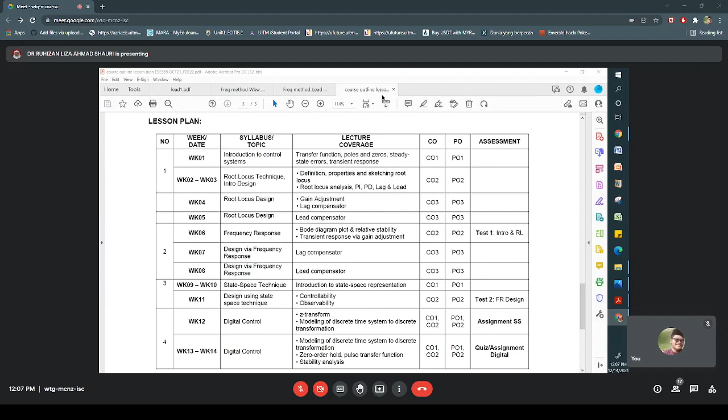I think that most of you are here now. Let's start with the lead compensator.

As what you have learned before in your root locus - guys, are you ready? Can I start? Okay, thank you. For lead, it is like the root locus that you have covered before.

Come on. Iskandar is here or not? Is Iskandar here today? Do anybody knows about Iskandar? Is he okay now?

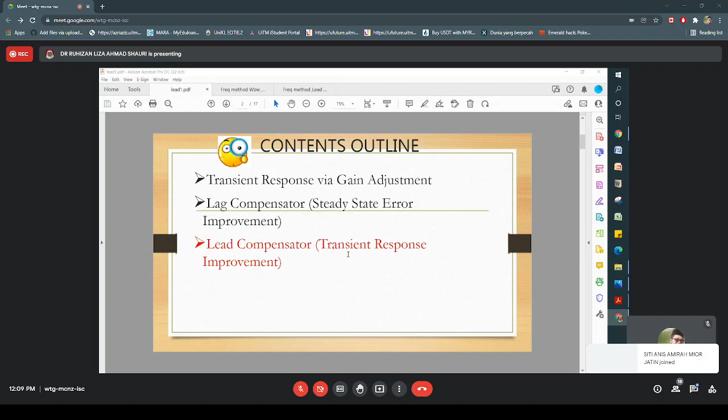All right, like what you have learned before for the root locus - from the root locus, transient response improvement needs the lead compensator. Okay, so here the same concept, you need the lead compensator, and for this topic, you are looking at course outcomes second and third.

The second is the ability of you to analyze the performance of your system using the frequency response method, and thirdly, the third outcome is about the compensator design, same like the lead design.

Yeah, this is from the PDF slides that I've already shared with you before. If you look at the lines here, the lead compensator is used to increase the bandwidth of the system, in order to improve the transient response of the system. Bandwidth is the keyword there.

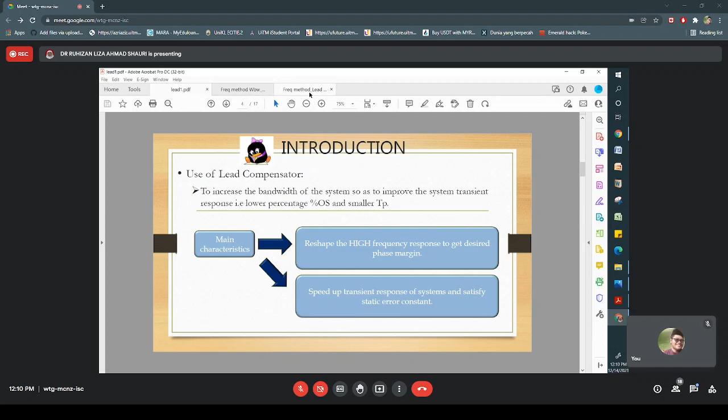So you can see the reshaping of the high frequency response of the magnitude to get the desired phase margin. Okay, several lines there. Now you come back here and read back, but now I'm going to show you the picture. I think I also have that here.

Yes, all right, now let's look at here. Same like with the text - this is the textbook, from the textbook, number 9. I do have the same thing here, so I will open this one instead.

Now if you read through the lines, it is to increase the bandwidth by increasing the gain crossover frequency, omega GCO. Where do you get omega GCO? It is when your magnitude plot, the magnitude response, crosses 0 dB, the gain crossover. That is where you have your omega down here.

All right, so your omega is there. In other words, that is where you start reading your phase margin from the phase plot. So that is omega GCO.

So here, increasing bandwidth, at the same time you are increasing the gain crossover frequency, by using the lead compensator. Now let's look at this plot, let me explain about this plot.

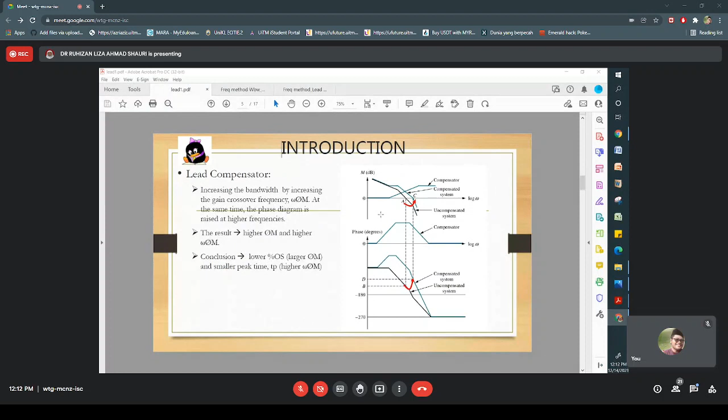Now, this bold black line is the uncompensated system magnitude plot. Now this one, can you see the blue line there? Yeah, okay, so this one is the compensator line.

Compensator's magnitude response. Now, remember your lag compensator, you draw it this way, starting from PC. It goes down with a slope of minus 20 dB per decade and then straight again. So you can see that it is opposite to what you will have with the lead compensator. You're going to draw this based on the calculated PC and ZC from the steps.

So lag is going downwards, lead is going upward, and because of that, GC, the lead compensated transfer function, GC times G, the original G, which is coming from this one. GCG multiply, so in the semi-log graph, it becomes plus, right? So here, the bold solid black line plus with that GC becomes that line. I hope that you can see my cursor. That is the lead compensated magnitude plot.

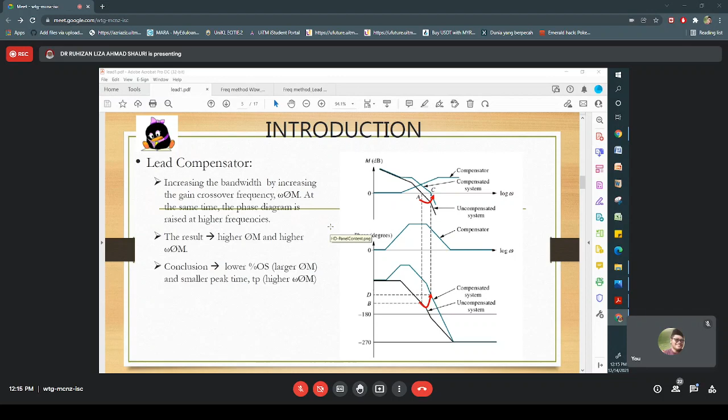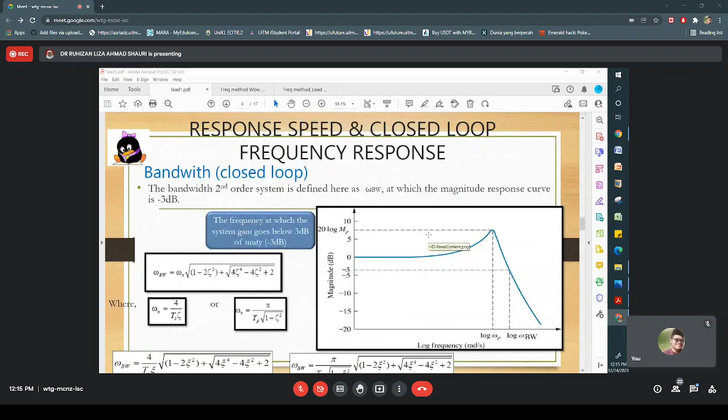Now, having that, this is becoming the new phase margin. We skip that first because that is the step. I want to explain why bandwidth matters, what it has to do with the transient response parameters: TP, TS, TR. Here we focus on these two, TP and TS, as they can be related with the omega bandwidth.

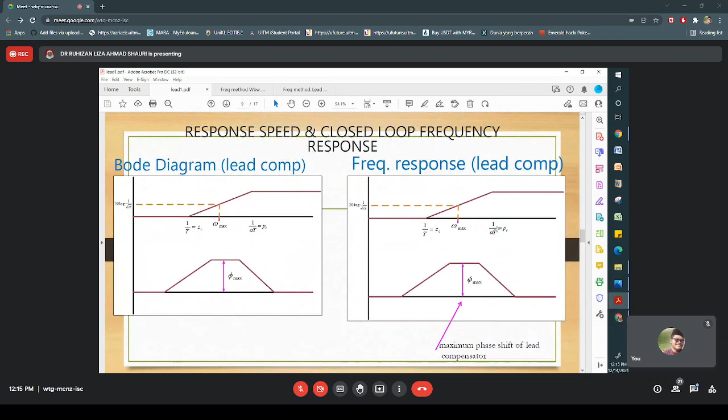Okay, I cannot see my laptop. Can you see the slide? This slide, the equation down here. Can you see it? It's a bit lower. At this, on this page, yeah.

Omega bandwidth is related with 4 over TS.

Hold on, Iskandar is here. Okay, thank you for joining, Iskandar. Are you good today? Are you feeling well now? I hope that you are fine. Yeah, Iskandar.

Okay, all right, let's continue. Omega bandwidth, look at the equation. This is with TS and this is with TP. Now, what do you think about the relationship? Is it directly proportional to TS and TP, or how?

The omega bandwidth is inversely proportional, isn't it? When it is inversely proportional, you can see that when you increase the bandwidth frequency, you will have better performance of the system in terms of the response time, right? The peak time shorter, TS also shorter.

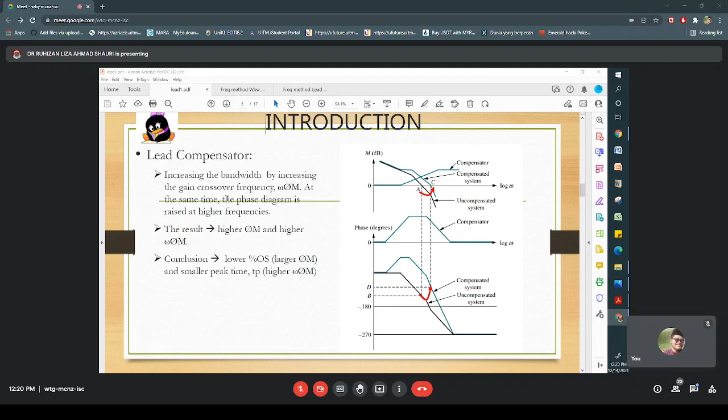And that can be done by doing the lead compensator. Related with the TP and TS, increased bandwidth would be able to shorten your TS and TP by this relationship. Got it?

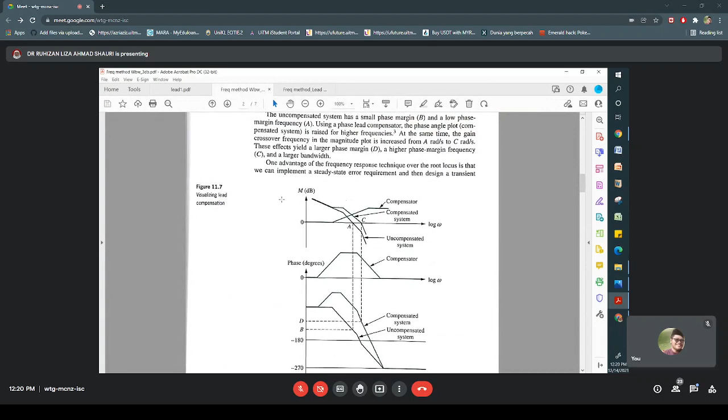All right, now I will explain more about the bandwidth using this page, from the textbook. When you talk about bandwidth, you also know about minus 3 dB. The minus 3 is where you can read your bandwidth frequency.

Okay, let me open my graph here. Let me show you the concept graph first, before I show the real graph. When you talk about minus 3 dB, you look for your bandwidth frequency from both graphs.

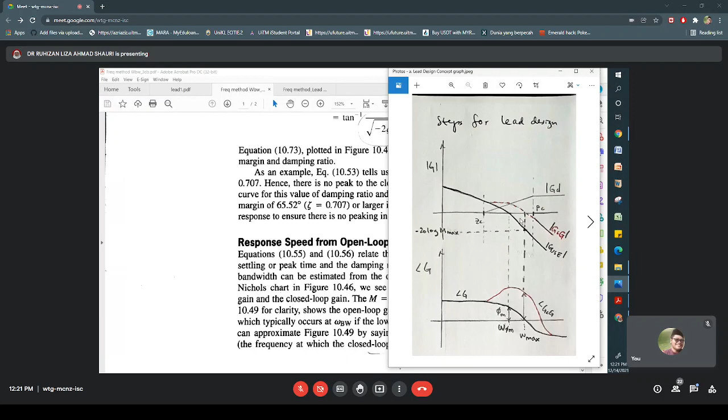Can you see my cursor? Okay, now you're looking at minus 3 dB here, the magnitude. Minus 3 dB means you're looking at where this magnitude line is at minus 3 dB, the frequency where you have that minus 3 dB of that line. That is where you can get your omega bandwidth.

All right, now you have a problem here. Minus 3 dB is for closed loop bandwidth frequency. But the plots that you have drawn from the beginning of our chapter 2 are from the open loop transfer function equation. So you call it open loop magnitude plots and phase plots, open loop frequency response. So you don't have closed loop frequency response to read the omega bandwidth at minus 3.

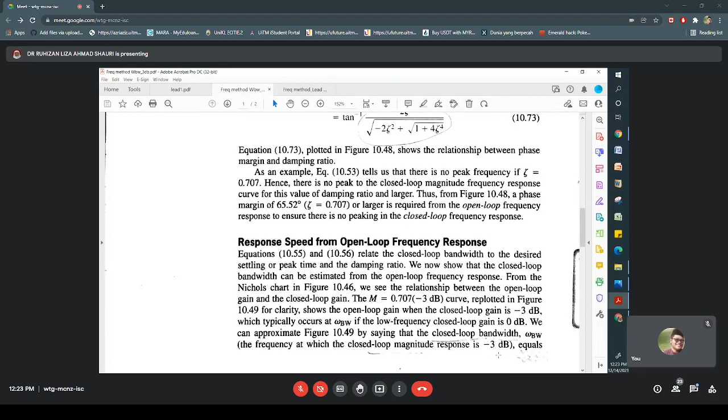That's the problem. But in the textbook, it's stated: the closed loop magnitude response at minus 3 dB, the frequency at which you get this minus 3 dB of the magnitude response, is equivalent to the frequency at which you can read minus 6 to minus 7.5 dB from your open loop magnitude response. Do you understand what I mean?

So minus 3 dB is the magnitude response value that you use to read the omega bandwidth frequency. But the graph that you have is from the open loop transfer function. So can you use minus 3 dB to read your frequency?

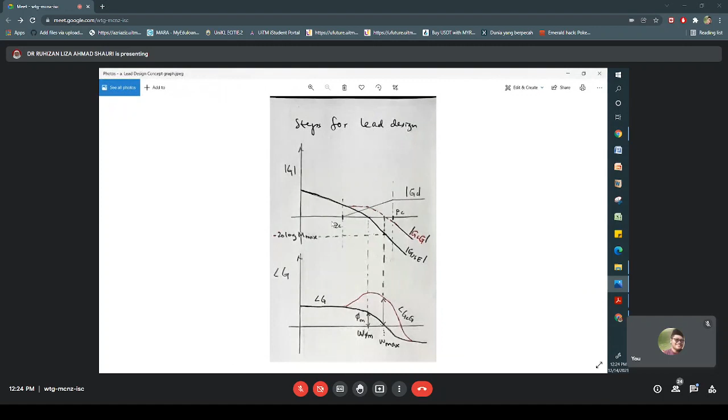Cannot. Instead, it is proven here that you can read the omega bandwidth not where you get minus 3 dB, but in this range, minus 6 to minus 7.5 dB. So in other words, if I open this up, it's not minus 3 that you are looking for, you are looking for minus 6 to minus 7.5 dB.

Now let's take minus 7, for you to memorize easily. Minus 7 is the typical value, and then you find your minus 7 from the magnitude response, and you read the omega as the omega bandwidth.

Because this is open loop magnitude response, this is the open loop phase plot, right? Not the closed loop frequency response. That is what it means by this pitch, the lines here. So you can read between minus 6 to minus 7.5 dB. Now jot that down in your notes.

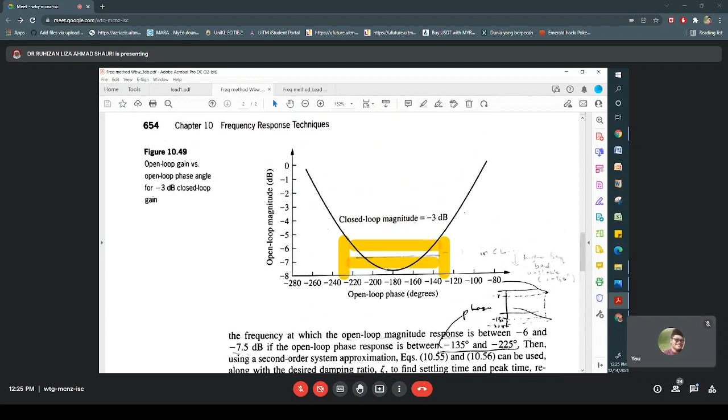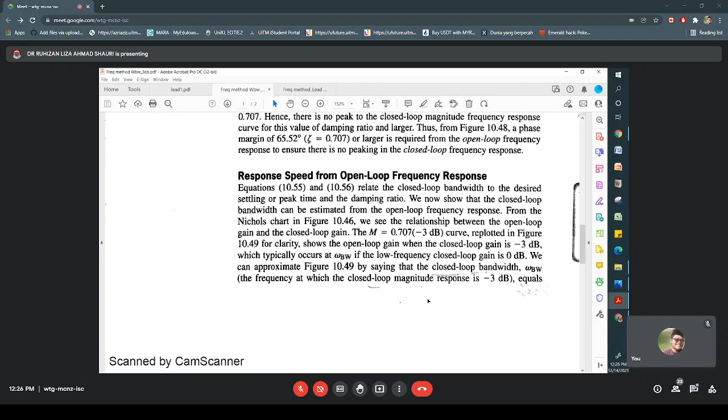Okay, I start back from the speech, talking about minus 3 dB for closed loop magnitude response. But since you don't have the closed loop magnitude response, but you have the open loop magnitude response. Why? Because you are using the open loop transfer function, KGH, to plot your magnitude and phase plots. But not to worry, instead of minus 3, you're talking about minus 6 to minus 7.5 dB now to get the omega bandwidth. That is the parameter that you can get, you can read from your graph later.

You want to check whether it is true that my bandwidth increases or not. Is it complying with the requirement about the time or not? You're going to do that in the steps. Now, is there any question until there?

Now when you design a lead compensator, you have to draw the red line afterwards. When you do that, it's obvious right? When you lift up the upper part of the magnitude response, you will increase the omega GCO as well as the omega bandwidth, because the upper frequency part of that magnitude response will shift up.

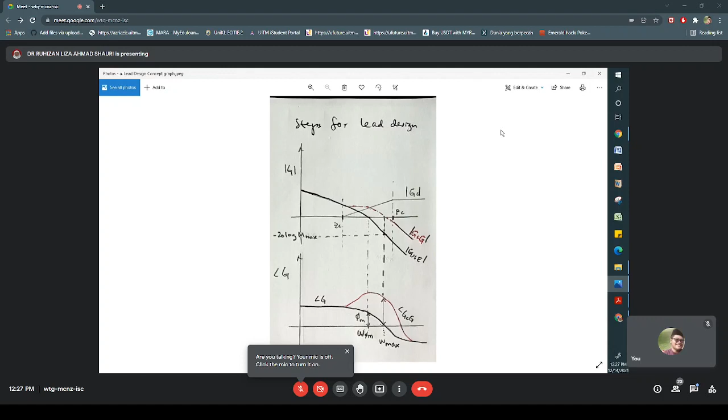So that is the concept of applying a lead compensator to your system to improve the transient response.

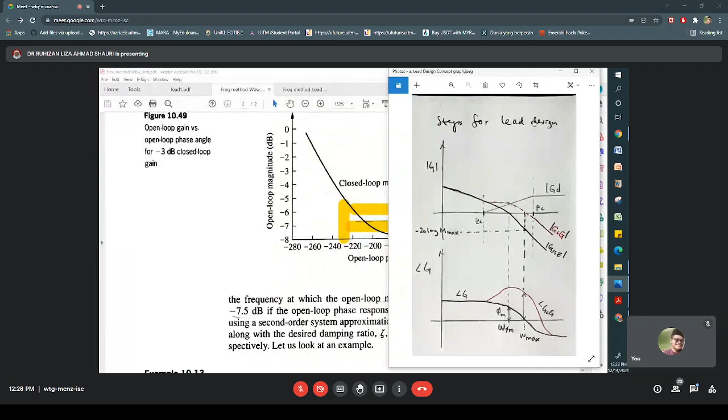It is still early, 12:30. Okay, let's move on directly to the steps. All right.

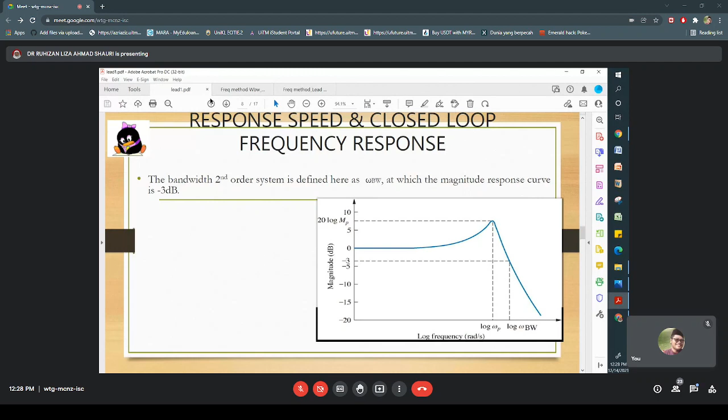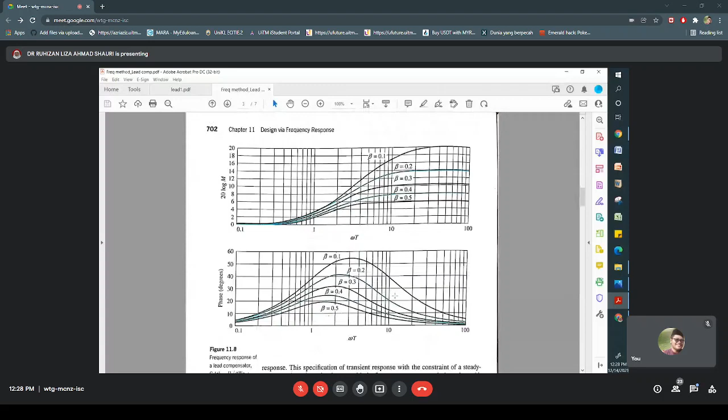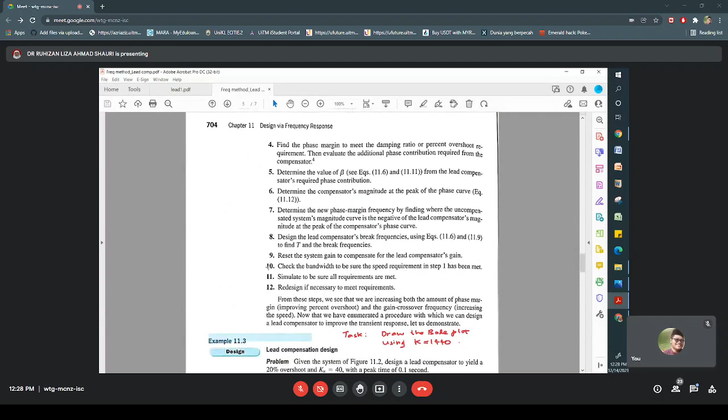Okay, the steps I will be using, I'll be using from the Nise version. The steps are here - the design procedure. Steps 1 until 12. You're going to use all the steps to answer this question.

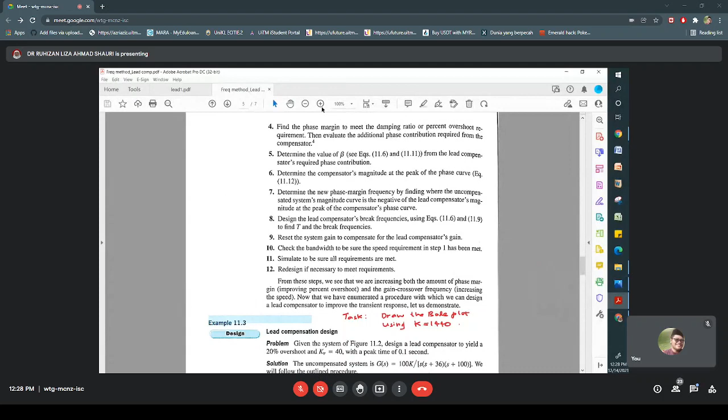Remember the question? Look again. Let's look at the question now. Any question, you stop me and ask me. If anywhere you need me to repeat, please tell me. Let's look at the question.

You are given the same system as in figure 11.2, the Bode plot diagram, where you have KGH equals 100 times K over s, times (s + 36) times (s + 100). So that is the KGH of your system, the open loop transfer function used to plot your Bode plot.

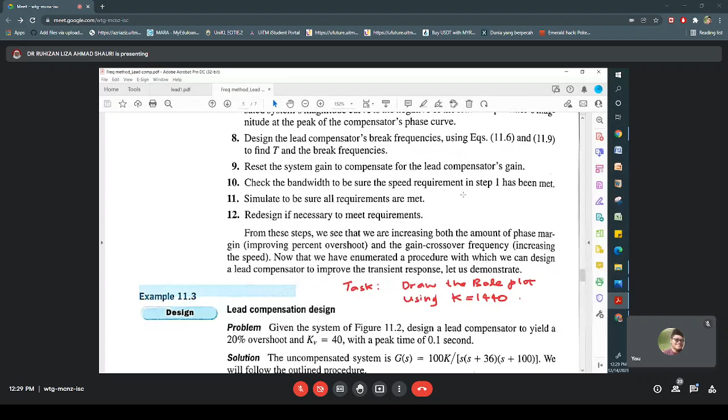Now, using the same system, you are required to design the lead compensator to yield 20% overshoot. That is one requirement. Mark that - let me highlight.

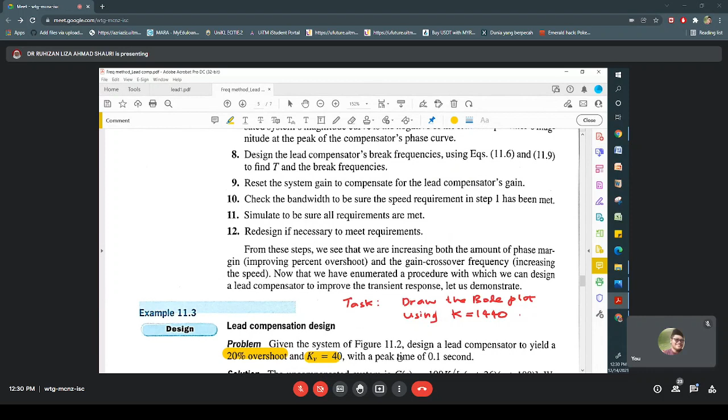So you have 20% overshoot, that's one. Secondly, KV equals to 40, that is the next one. And the last one is the peak time, TP equals to 0.1 second is the requirement here.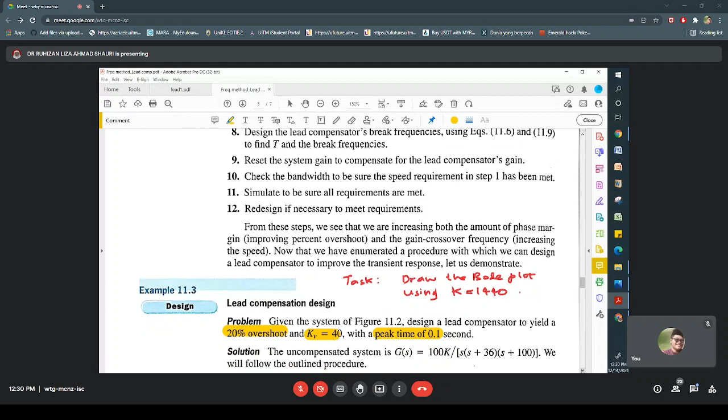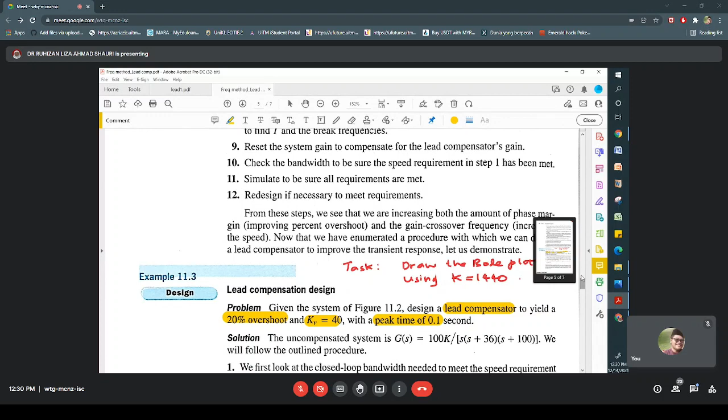Right, so that is the equation that you used to plot your graph. Remember three things here. The lead compensator is used to achieve and solve these requirements.

All right, now step number one. Ready? Am I going too fast? Are you ready? Yes? Okay, shall we?

All right, let's start. Take out your graph. You need your notes here to write down the answer for each step.

Number one, it asks you to calculate the closed loop bandwidth for the required peak time. You don't have the settling time, but you're given the peak time, TP of 0.1 second.

Now I need you to calculate this later, when we go to step number 10. When we are at 10, later on, do this number one. All right, now let's look at number two.

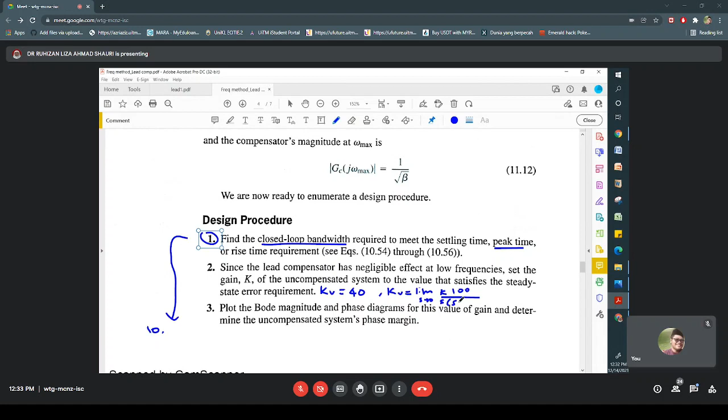In its equation, with the open loop transfer function, limit s to 0, then you have K. That is the original equation, isn't it? 36, and then you have s plus 100.

Okay, you have that equation. Now look here, you have your K. Since KV is given to you, you can use it to calculate your K. Calculate now - what do you get?

That is the equation that you know, right? Limit of your KGH there, you put back and you calculate the K. So remember number two, it asks you to find the K. Why do you need the K? Because you want to plot. You always need a K to plot.

1440. 1440. Yes, Hilton. Yes, Alia. Isn't it that is the value of K that I asked you to plot your bode plot with? Yes.

Okay, the reason is here. You get K equals to 1440 there. 1440 is actually the value of K if you use your KV there given in the question.

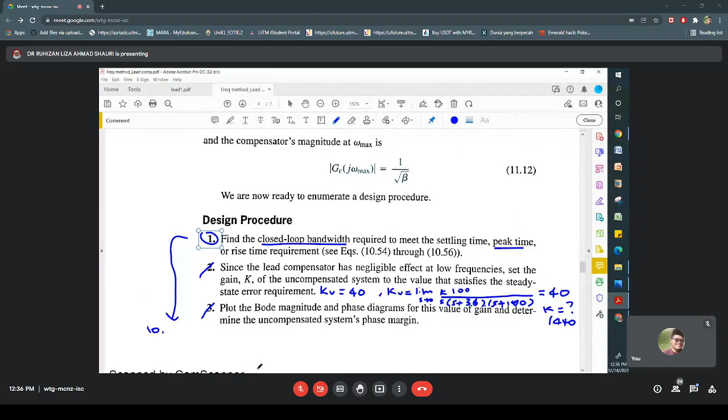All right, now next, let's look at number 4. Tell me if you need me to repeat. Okay, ready? Number 4.

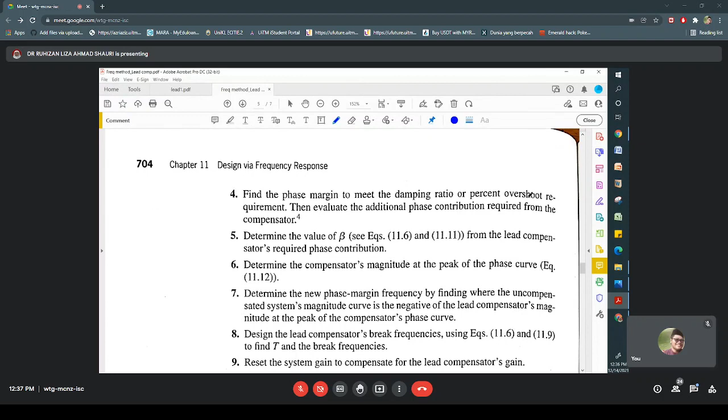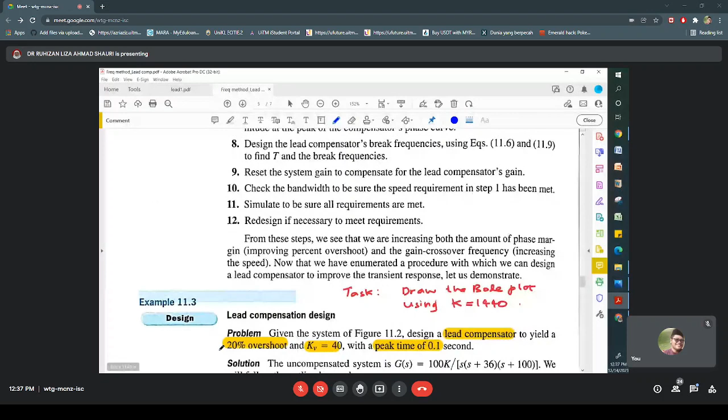Find the phase margin to meet the damping ratio or percentage overshoot required in the question. Now you have 20% overshoot, right, in the question. Look back at the question. Okay, so here you have 20% overshoot. Yes, there is a requirement. So it means that

you need to find the phase margin. Means, okay, from your 20% overshoot, get the zeta. Right? Because you need to use the zeta to calculate your desired phase margin. Okay, so what do you want to use? ΦD, phase margin desired, ΦD in short.

Boleh? Okay, alright, so which equation to use? Okay, we have done this before. During your gain adjustment, you have been introduced with the equation to calculate the phase margin. Okay, let me open that for you. Put gain adjustment.

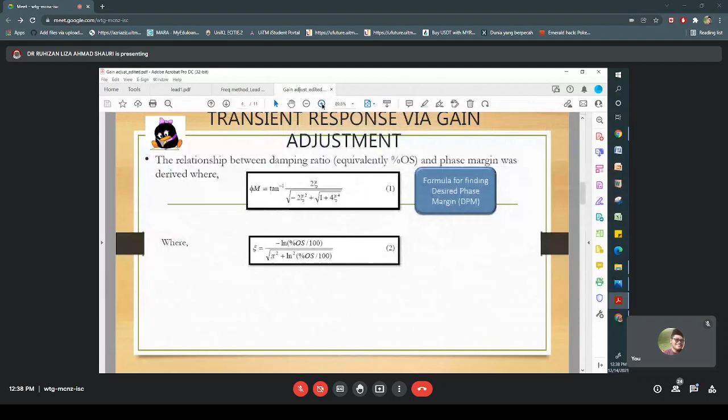Right, calculate for me now what is your ΦD, using, okay, where is the formula? This one. Okay, you have used this before, during your gain adjustment, okay, and also the zeta also you use it. The phase margin you use it in lag, right? Okay, so here zeta, calculate first for me and then tell me what is the phase desired, phase margin desired, from this equation. Do this now.

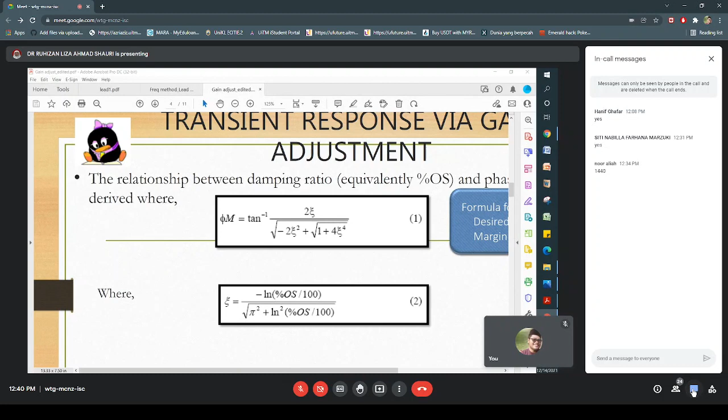Yeah, I think I have some answer there. Okay, thank you very much. We stand. Yes, yeah.

Zeta is equals to 0.456. Yes, that's correct. Okay, next, phase margin.

Yeah, calculate now. That's quite a long equation for you to calculate, right? The zeta with the, yeah, quite high order there. Fourth, yeah, twice inside the equation. So be careful.

Okay, I put there, yeah, here. Okay, so here is equals to 48.1. Yeah, based on the equation, right?

Okay, now find the phase margin to meet the percentage overshoot as required. Yes, we have got it. Yeah, 48.1 is the answer. Then evaluate the additional phase contribution required from the compensator.

Okay, what is this? Okay, phase contribution is actually the fee max. Let me write it down for you. It is here, fee max, we call it as phi max. Okay, I called it, I name it as phi max, yeah?

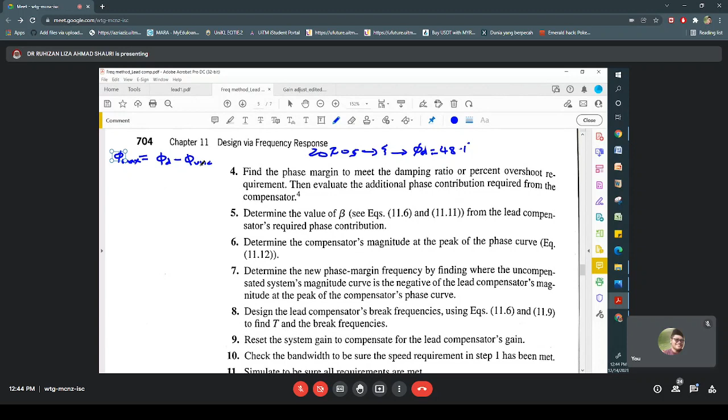Phi max, right, equals to the phi of D, the desired, minus, okay, fee of what you get from the graph. Phi, what is phi? Phi is the phase margin, okay, plus the correction factor. Okay, now here you get the fee D there. Okay, and what about the fee uncompensated from the graph? Phi UNC, okay, this one, UNC, I don't want to write so long, yeah.

Uncompensated, I cut it short, UNC. Shall we? Yeah, so this phi uncompensated, you need to read from your graph. All right, now let's look at your graph.

Okay, this is your graph. You have to read what is the current phase margin from your graph.

Okay, let's look at your graph. Your graph should start the magnitude plot at 52, right? And then you plot using the same slopes that you have used before, for another K. So here with the new starting point 52, you plot, and here you are.

The omega GCO is there. Omega GCO, yeah, the magnitude where you have it crossing the 0 dB, and then you can read your omega. Omega GCO, or in other words, you can also put as omega PM. It doesn't matter, it's the same thing.

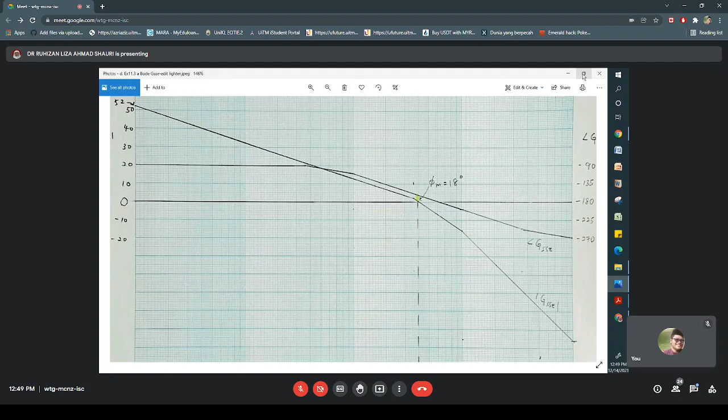Okay, so take your own answer and let's continue with the steps. Let's take 18 as what I've got here. So here, your answer for phi max, calculate it now. My phase margin from the uncompensated magnitude and phase plots gives me 18 degree.

Okay, so get that and give me your answer for phi max. 40.14. Yeah, 40.14, okay, 40.1. All right, so we finish. We get phi max.

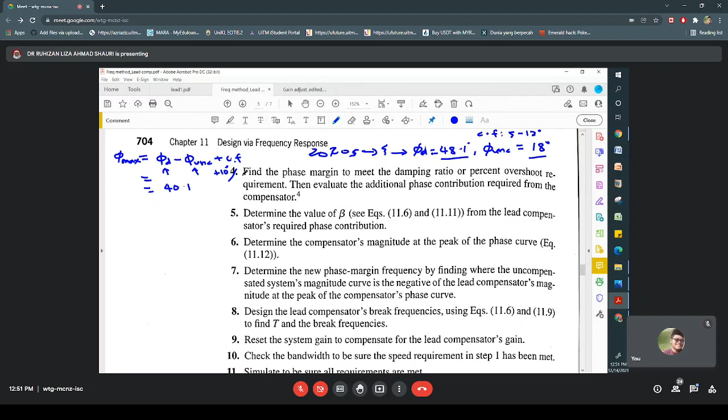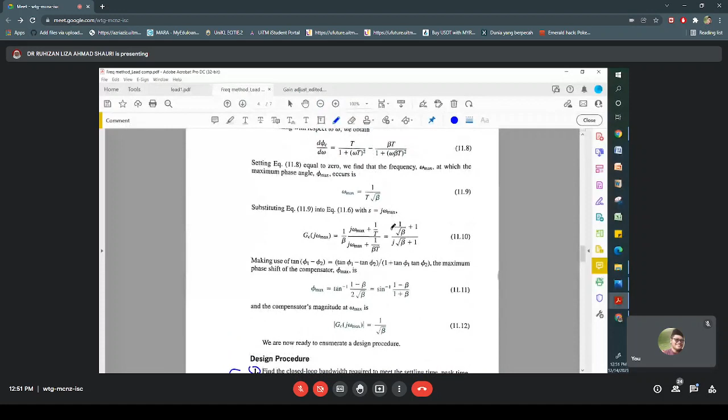Now, in the previous page, let me reduce the size. Okay, you have this page. Don't worry, all these equations are also written in the slide. So this is the slide. Right now, let me use this slide instead, so that you don't have to be worried. GC, look at the formula.

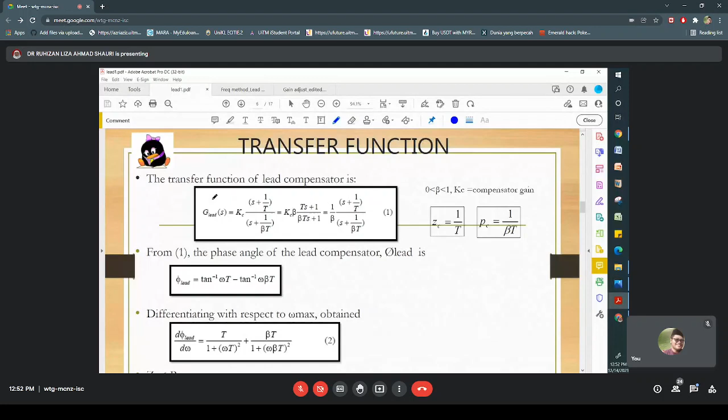GC, here, the G lead there is also the GC. If you look carefully, it is the same equation that we used before. GC equals to KC times S plus ZC divided by S plus PC. Same.

So here, ZC equals to 1 over T. ZC equals 1 over T is written here. PC equals to that, it's written there. And the KC equals to 1 over beta, see?

1 over beta. So KC equals to PC over ZC, equals to 1 over beta, over 1 over beta T, divided by 1 over T. So you have 1 over beta.

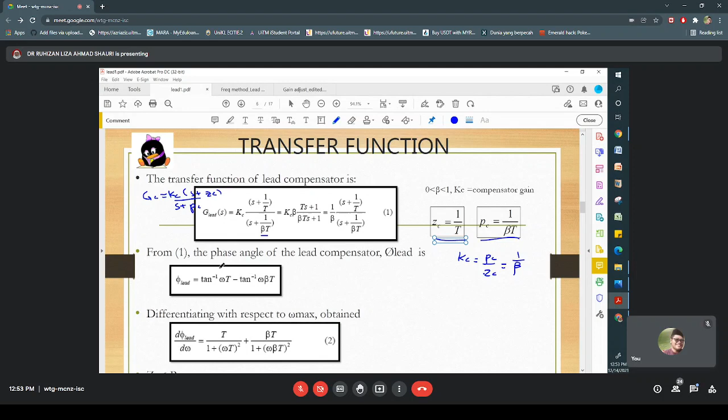That is about GC. Okay, you're looking at beta, right? Where is my beta? Okay, here, on page 7. Beta is okay here, right here is your beta. It actually starts from here, like also in the textbook, it starts from here, and you rearrange it to get beta as the left side, because that is what you want to calculate based on the phi max. Phi max, step number 4, we have got it.

You're going to put the phi max here. The example that I have here is 40.1, from my graph. The phi max, you calculate it, and I get 40.1. I put it here to get my beta. Okay, so calculate this now, use this formula.

0.22. Yeah, okay, 0.22. Let's write it down. Number 5, okay, 5.

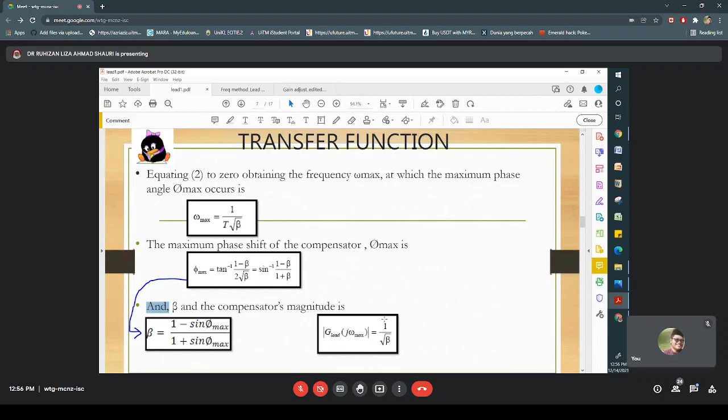Let me tell you what this is. This is the M, M max calculation. So this one, you have to use this formula. Using the beta, you have to calculate this one, this one. Can you see the equation down here? This one, yeah, okay, this one. I also can write this as M max, because I don't want to write so long like this, so I want to use simple terms. M max, okay, so to calculate M max you have to use this one, 1 over square root of beta. Okay, calculate now.

2.15. 2.15. Yes, okay, next, on the graph.

On the graph. Okay, this one on the graph. You have to use 20 log, because this is magnitude. But it is not yet a value that you can refer to on your graph. 20 log M max. Then only you get it in dB.

Okay, what's the value here? Alright, okay, get it. 20 log. Daniel Fitri, yes, 2.15, 6.66. Yes, what, Shelton? 6.66, yes, yes, that's right. Okay, you have 6.6 something dB, right?

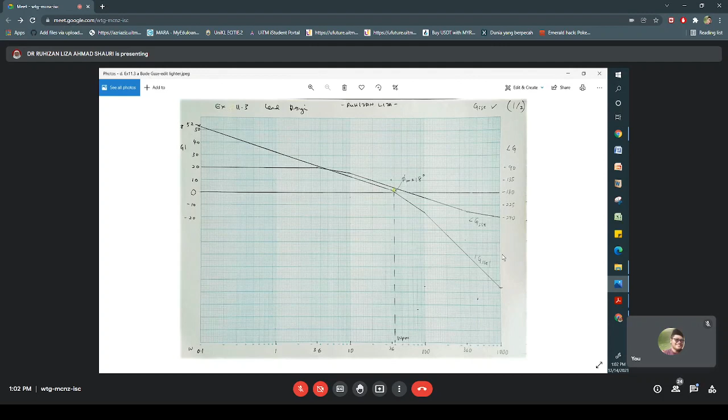Now I have it here with my sketch for that. Not so clear, isn't it? But I hope that you can view what I'm doing here.

This is the GC. Why GC? Because of the KV, I just name it as GC. So then I'm trying to locate where is my minus 6.6.

It's about there on the magnitude plot, and then I'm looking for the omega to get that value. So that one I mark it as omega max. Look at your graph, tell me what do you get for omega max now.

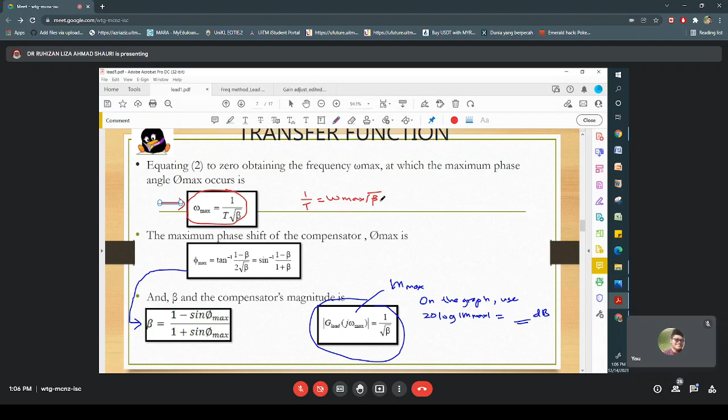Why is it that you need to have the 1 over t? Because 1 over t is your ZC, can you see that? And then that 1 over t, or the ZC, you divide by beta, you'll get your PC.

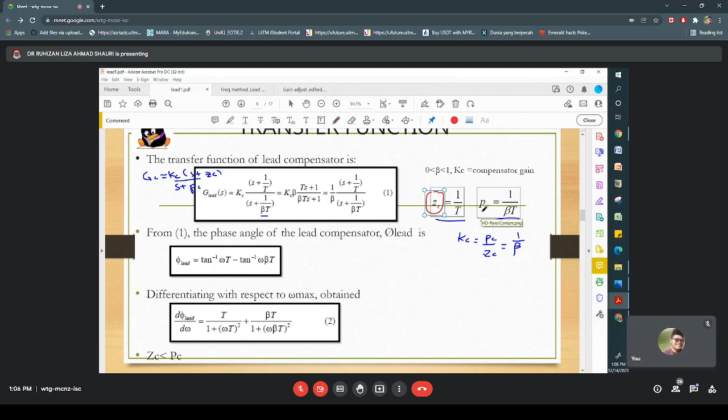Right, so that is step number 8, to get the ZC and the PC based on the 1 over t that you can calculate from omega max. So I write it down here, and you can continue.

Okay, to get from omega max: 1 over t equals to omega max square root beta, and that is your ZC. Then get your PC. Then get your KC.

Okay, all right, together: PC, ZC, KC, you will get your GC. Write down your GC, putting in the value of KC, ZC, and PC inside the equation, you will get your GC transfer function.

I write it back here. There you are, finish with GC.

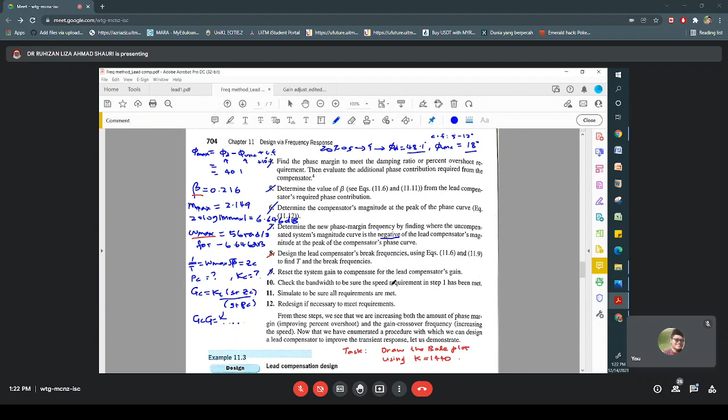Okay, what's next? Here, number 10. Check the bandwidth to make sure that the speed requirement is met. Speed requirement is about TP, right? From the question, TP. You see the question here. TP is 0.1 seconds.

So number 10 is asking, please check is it that the design has met the speed requirement or not. Okay, so how to do this?

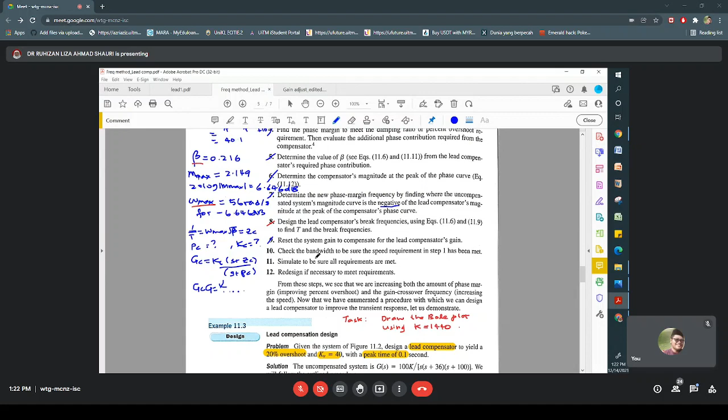Is by taking back number one. Number one, just now we skip, right? You have to take it back and then go back here, do it together with number 10. You have to calculate first the closed loop bandwidth that is required to meet the peak time in the question.

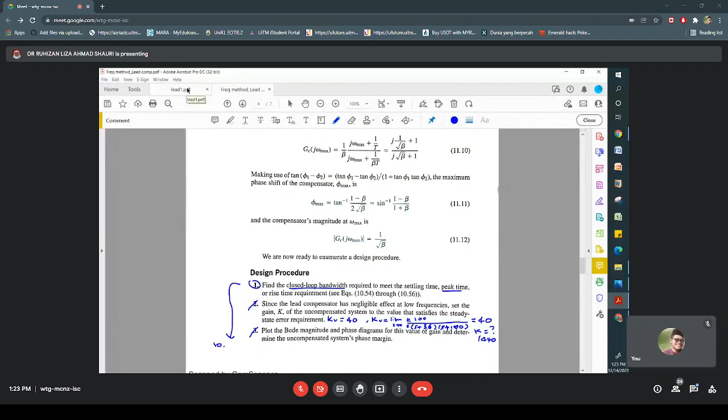Okay, so 0.1, use the... okay, not this one, close that. Where is the equation? Here, you have the equation on this page. So take this equation, calculate for me the omega bandwidth desired now. Let's put a name, omega BW DES, omega BW desired. Okay, calculate for me what is the value that you get.

From the question it's 0.1 for TP. So it means that this is the desired frequency response. Later you are going to compare with what you have got in the graph. Okay, calculate for me now for this one first.

It's quite a long equation to use, so be careful.

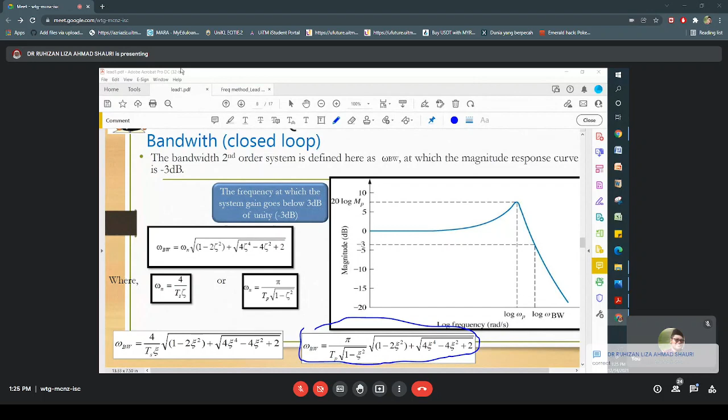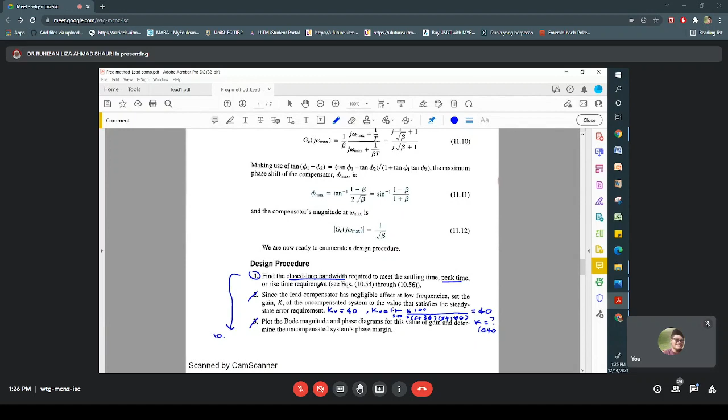Okay, now going back to the steps here. Right, okay, you have calculated number one, for the closed loop bandwidth required for the 0.1 second TP. And then, okay, so here...

You have to check the bandwidth, the bandwidth of the compensated system. Okay, that is number 10. This is quite difficult. Okay, what you need to do is that... am I too fast?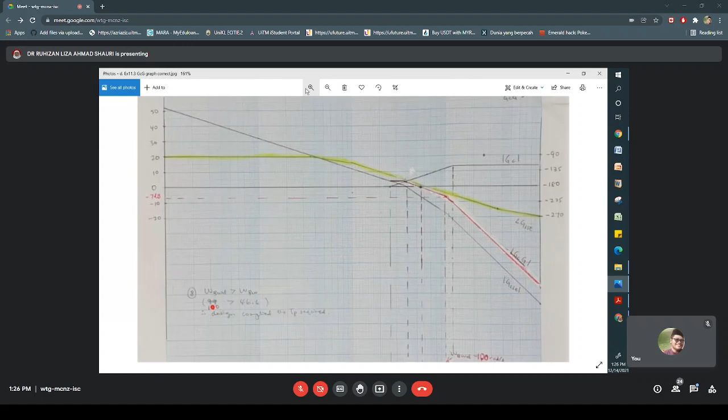Okay, let me tell you what is about number 10 first. Now first of all, to answer number 10, you have to plot the red color line. Okay, the red color line you have to plot.

How to plot that is by plotting the GC first. Now you get your ZC, you get your PC, right? ZC, PC, you've got it already. So what's next is to use the values of your PC and ZC to plot this GC.

After you plot your GC, you sum the GC, that is 20 log on the graph. So this line, magnitude response line of GC, you plus with the original line, the GSSE, where you use the K equals to 1440 in step 2. Sum this together, this and that together, you will get the red color line.

Okay, now from the red color line, this is what you call as the lead compensated magnitude curve or magnitude response.

Remember my explanation about bandwidth frequency? From the Nise textbook it says that since this is open loop magnitude response curve, you have to look at not minus 3 but between minus 6 to minus 7.5 dB.

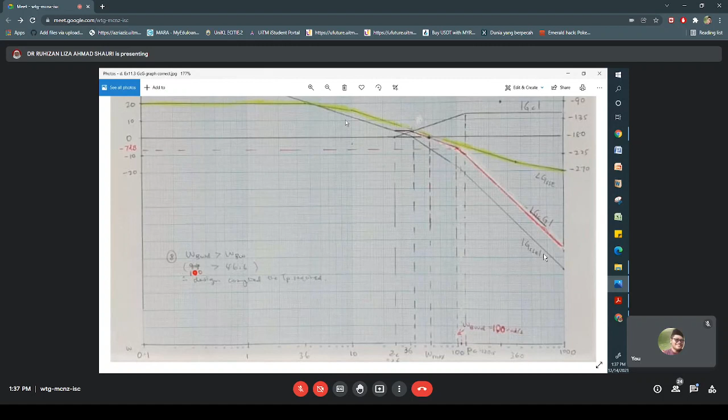Okay, now is there any problem plotting the GC? Can you tell me how's your drawing? I mean, are you doing okay?

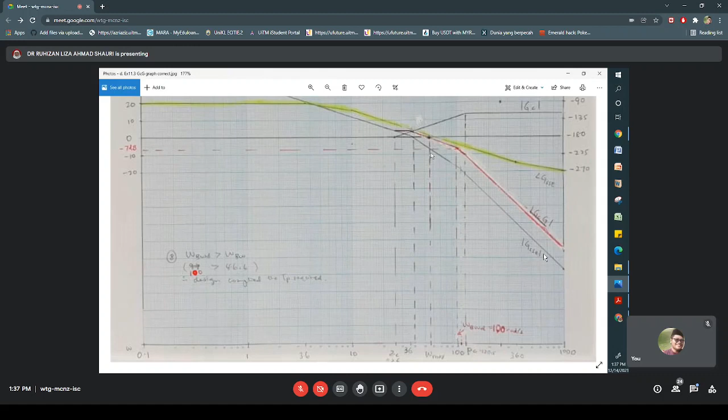Okay, madam. Okay, right. Okay. Now,

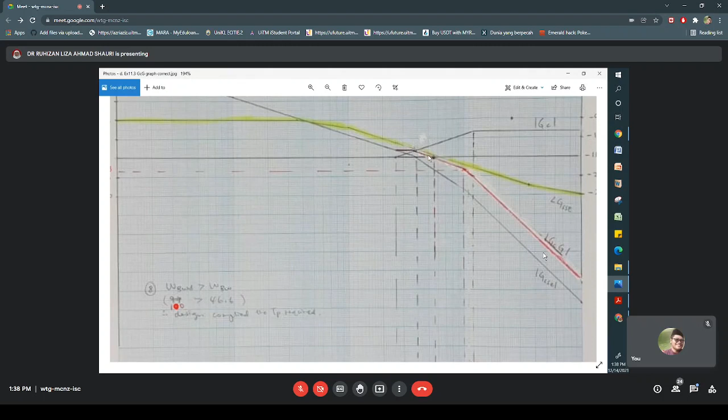Okay, so this is the thing. Okay, so how to draw this red color, red line? Okay, you can some, of course. Yes, some can. Okay, but it's very small space there, right? Okay, I want to show you something here, so that you can try at home and plot this red color. Okay, ready?

No. Maybe you need 2 minutes more, before I start. 2 minutes, okay, finish your GC. GC is where with this one, okay.

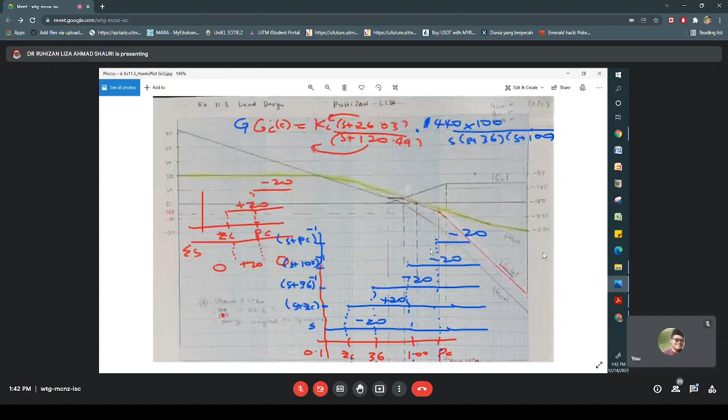As usual, you have all the factors lined up: s plus 36 inverse, s plus 100 inverse, and the additional ZC (not inverse) and PC inverse. So you have that 1, 2, 3, 4, 5, all lined up.

For the integral factor, you have minus 20 dB per decade slope all the way, starting from the beginning. The red axis here is where I put the corner frequencies, or the constants, from the factors.

Now you have ZC then PC added together, because you're talking about GCG now, and you want to draw the GCG. So you have ZC and PC added. My ZC is lesser than 36, so I put it first, and my PC is greater than 100, so I put it later after 100.

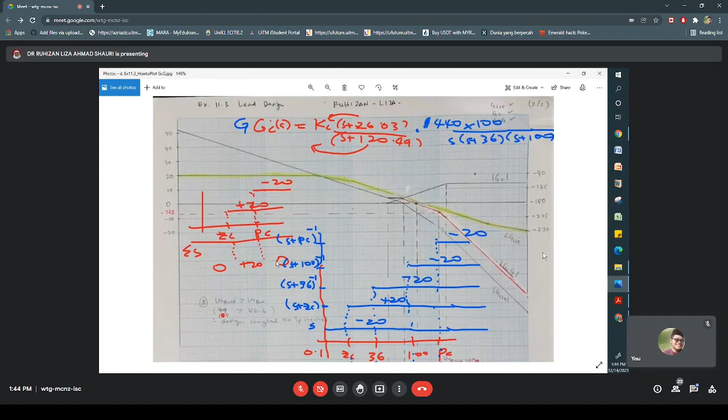ZC, what is this? This is a first order numerator, because it is up there, based on the Bode plot slide, right from the beginning when we started chapter 2. For the first order numerator, it should give you plus 20. There you are, starting from ZC, I have plus 20.

Guys, are you there? Is it okay? Okay, I'll finish first, then you ask questions, okay?

S plus 36, or the J omega over 36 plus 1 inverse, that factor is a first order denominator. So you have, as usual, minus 20 all the way, right after 36.

100, after 100, where is my 100? Here you are, my 100 there. After 100 you have minus 20, and then your PC is after 100. So after PC, the value of PC, then you have minus 20 dB per decade.

Sum them all downwards. You can use your slope table. No problem, this is just another representation of how to calculate the total slope across the frequency.

So here, 0.1 to ZC, I sum the value, minus 20. ZC to 36, I have 0, because the minus 20 has been cancelled by the slopes from the ZC. So ZC to 36 is 0. 36 to 100 is minus 20, and so on and so forth.

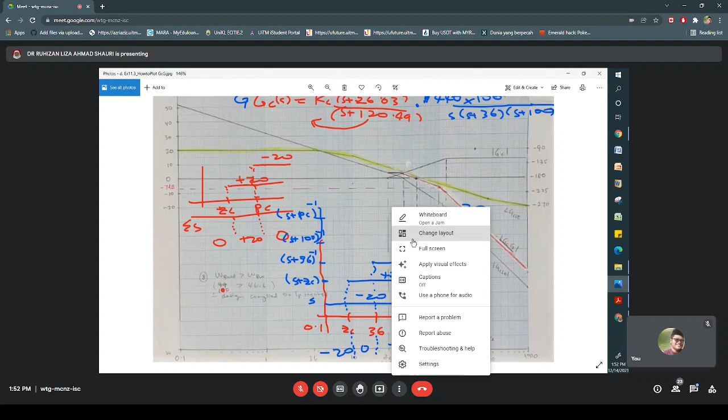You don't have to use my line method, you can use your table of slopes. As usual, you draw one table. Now you have to consider the ZC and PC, and what I want is the total slopes there, according to all the corner frequencies, the constant of your factors.